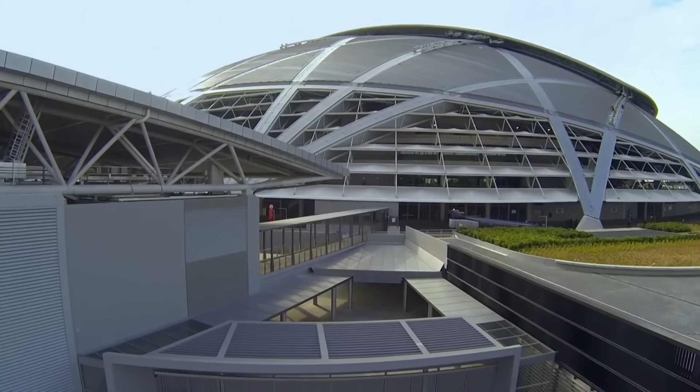The Singapore Sports Hub has arrived, the world's ultimate multifunction sports complex. Like a giant transformer, it adapts to host more than 30 different sports. The sports hub in general is amazing because it's state of the art. And its crowning glory is the new National Stadium. We needed to create a world-class venue, a landmark.

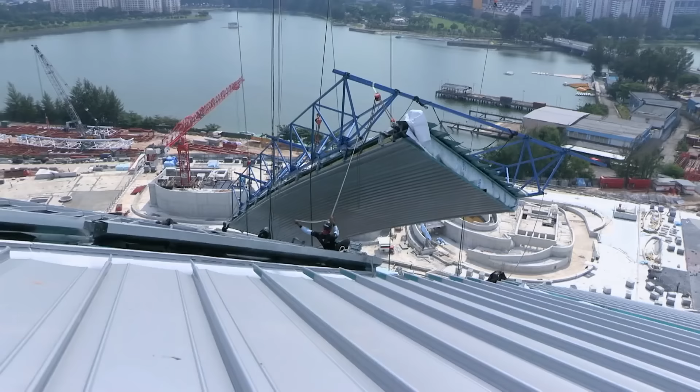Building the Sports Hub has been an epic 3-year journey. Welcome to my office. An army of workers risked life and limb to create the stadium, 9 other multi-purpose venues, and the world's largest free-spanning dome roof. A bold vision that is now Singapore's Field of Dreams.

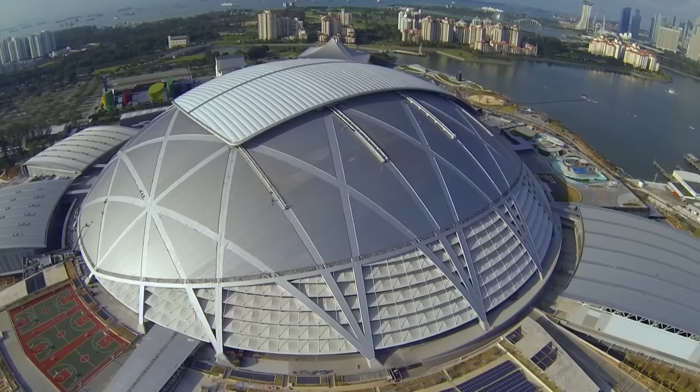June the 28th, 2014. It's open house day at Singapore's brand new National Sports Centre, a place where everyone can play.

The typical conception of a stadium is that it's a place where you hold big events. When you're not having a big event, it lies empty and quiet. So we wanted the Sports Hub to be alive all the time, somewhere Singaporeans will come on a regular basis, not just for big events, but to take part in events themselves.

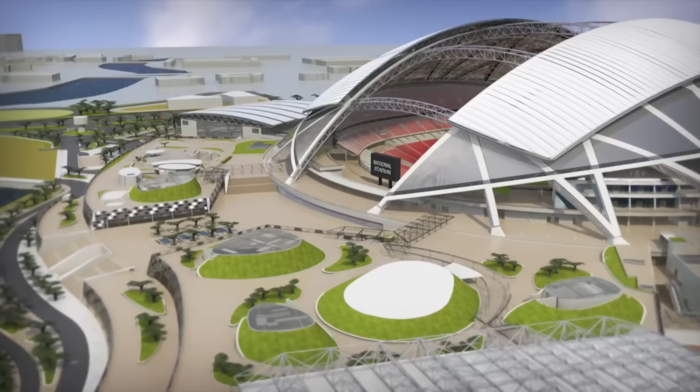The Sports Hub is jam-packed with features: a 55,000-seat stadium, sports halls, water sports centre, public water park, indoor aquatic centre, and a multitude of community facilities, including a museum, a library, and even a retail mall.

But this place is about much more than fitness and fun. It's a fantastic stadium, but it's got a big job to beat the old National Stadium.

The Sports Hub is also the proud new home of a great tradition, a tradition that began on another memorable opening day 40 years ago. I now declare the stadium open.

In 1973, Singapore's brand new National Stadium was a monument to a young nation's unity and pride, and a symbol of its determination to make its mark in the world of sport. That year, the National Stadium hosted the Southeast Asian Peninsula Games, an unforgettable moment for Singapore and for Singapore's greatest sprinter, C. Kunalan.

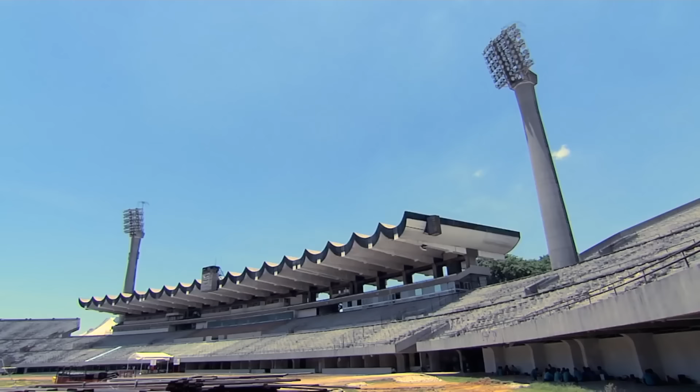But almost 4 decades since its opening, the National Stadium's race had run. Our national stadium was beginning to look quite old, and our aquatic stadium in Toa Payoh, both built in 1973 when we first hosted the SEA Games, and we all wanted to see modern facilities.

The problem was where to put them. Vacant land is almost impossible to find here. Singapore's new home of sport would have to be built where its old one already stood, the Kallang Basin. So the old stadium had to go. In September 2010, the bulldozers moved in.

When I found out that National Stadium would be demolished, not only me, all my friends, teammates, we were surprised and very sad.

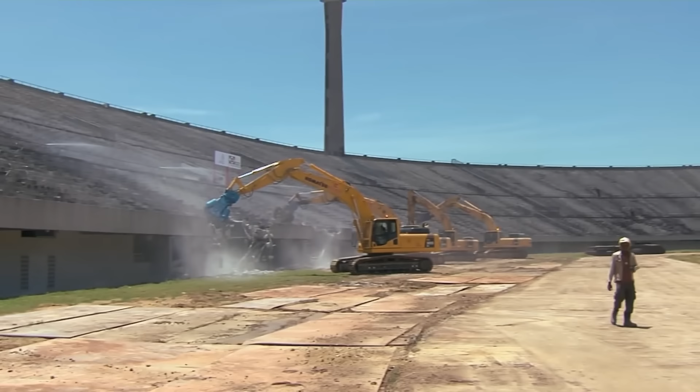Although I did feel it was a big part of me, a big part of Singapore, when it was finally decided that the only way was to demolish and rebuild, I was in support. The way I look at it is sacrificing for the greater good for the future. Our young people are not going to be thrilled by that old stadium, so when they see this new hub, they will be thrilled. I think it's for the better.

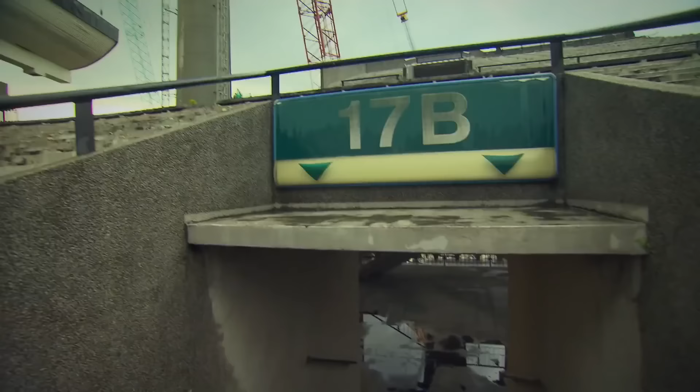The entire Sports Hub project has to be completed in under 4 years, so there's not a moment to lose. Even a national icon has to come down fast.

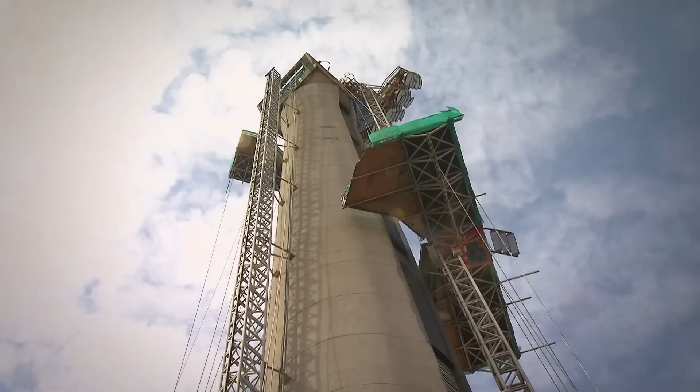It's now November 2010, 3 months after demolition began, and lead engineer Liu Yu Sin knows he needs to pick up the pace. It's a bit of pressure because time is short, we have to work very hard. But a giant obstacle is standing in his path.

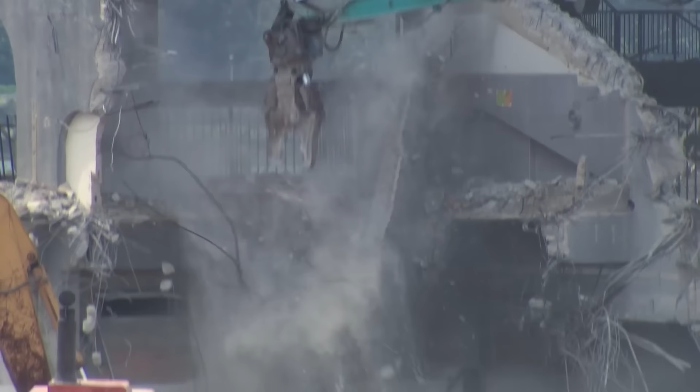The stadium's iconic 68-meter light towers were made to last several lifetimes, and they're far too tall to be safely demolished by heavy-duty crushers. Liu's team considered using explosives, but flying debris could damage neighboring buildings. So they decide to try a rarely used demolition technique: slicing the towers into 4 manageable pieces, so the crew can bring down one piece at a time and crush it at ground level.

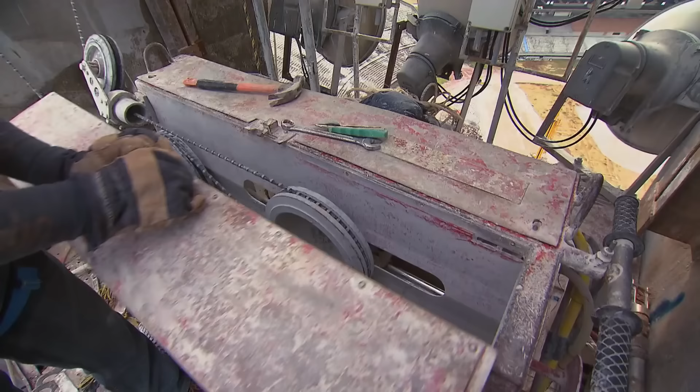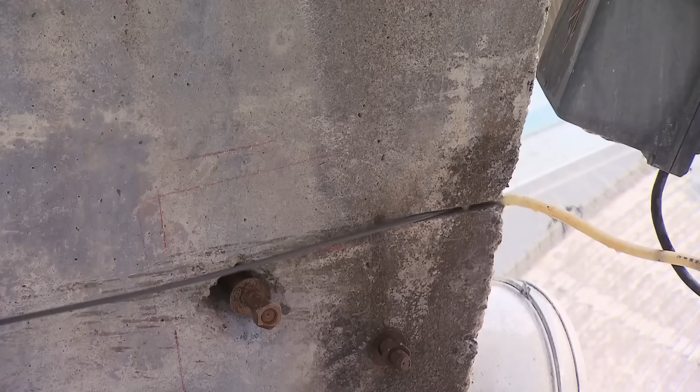But they can't slice the towers with an ordinary steel saw, so Liu turns to the ultimate weapon in his demolition arsenal: the diamond saw. The white part is the diamond. Inside it is steel wire with rubber. When the machine starts, the motor will pull the diamond wire, and the diamond wire will start cutting the tower. A stream of water keeps the cutting cable cool.

If it overheats, the wire will expand, jam, and then snap, with terrifying consequences. If it breaks and someone stands nearby, it will snap at somebody and injure them.

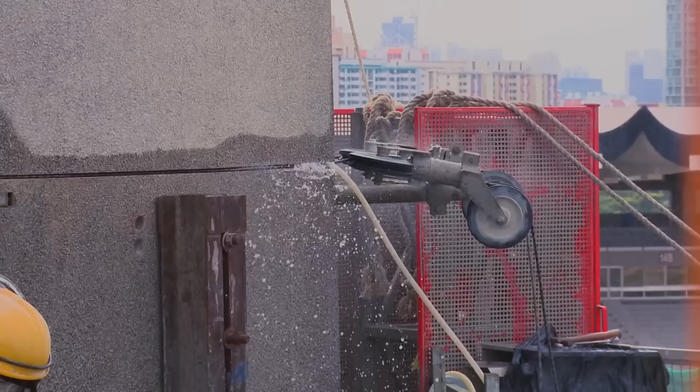As if deadly diamond-studded wires aren't enough to worry about, a thunderstorm suddenly appears on the horizon. If heavy rains come and there's lightning, we have to stop work because this will endanger our life.

With a ground team keeping an eye on the menacing clouds, Liu presses on. So the tension, okay ah?

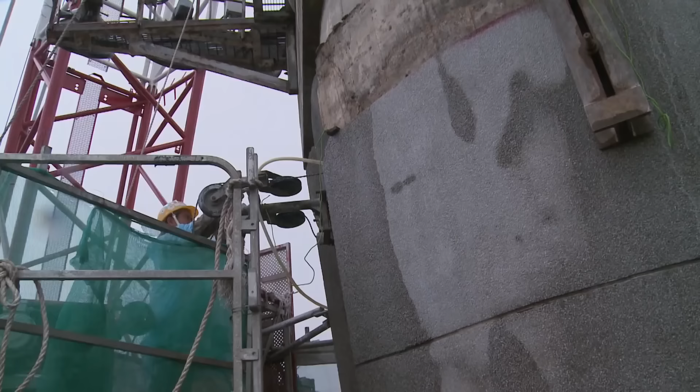Finally, after a full day's work, the diamond saw slices through. That's the first of 3 cuts on this tower, and there's still another 3 towers to go.

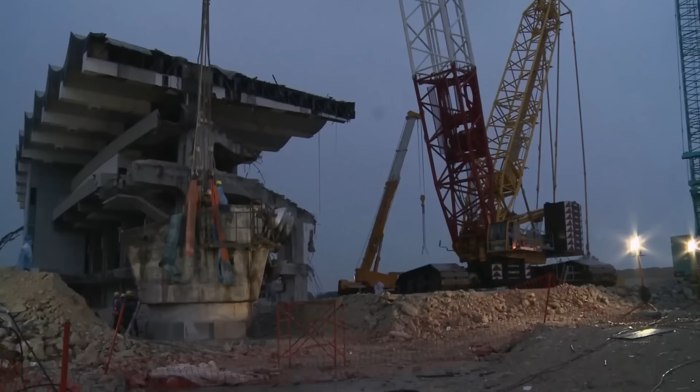While Liu's team reduces the old stadium to dust, that's a challenge in itself. A design team of local architects Teo Hai Pin, Sia Chi Huang, along with Clive Lewis, were working overtime on its replacement.

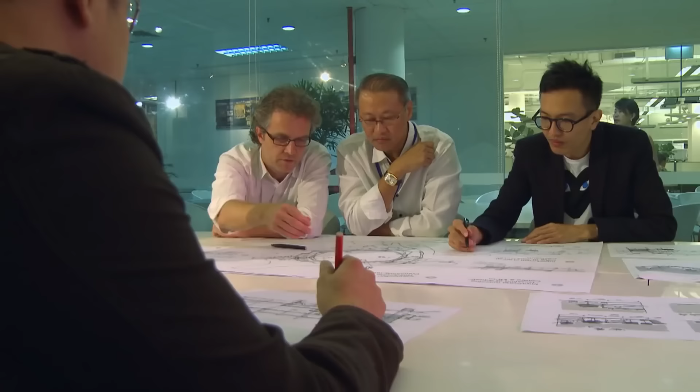It actually has mechanical exhaust, which means it starts to act like a ship. I think we were struggling with the identity, to arrive at the identity for the national stadium.

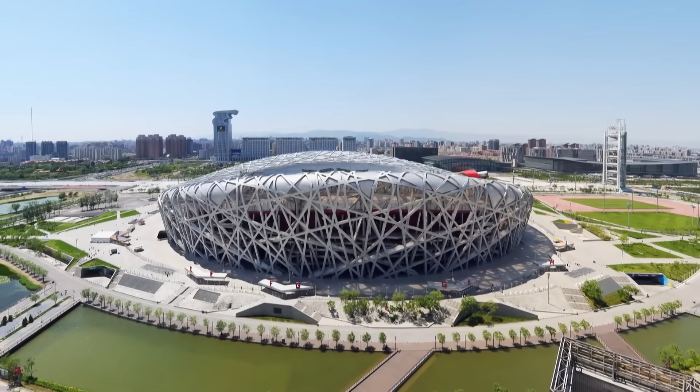They've had a hand in building some of the world's biggest stadiums, including London's Wembley and Beijing's Bird's Nest. Singapore's new stadium needs to be just as impressive. It is supposed to be a national stadium, so we needed to create a world-class venue. But how do we aspire to create a landmark?

The team turned to nature for inspiration. They drafted designs sparked by tropical plants and experimented with curves and spaces.

After going through many designs and many debates, we started to appreciate a very simple structure. So a simple dome eventually was adopted, and the trick then is how to make this simple structure look beautiful.

It's actually quite emotional to see how it has grown, and we have spent 8 years of our life on the project. But what we are really looking forward to is how we see our design translate from paper to the physical form.

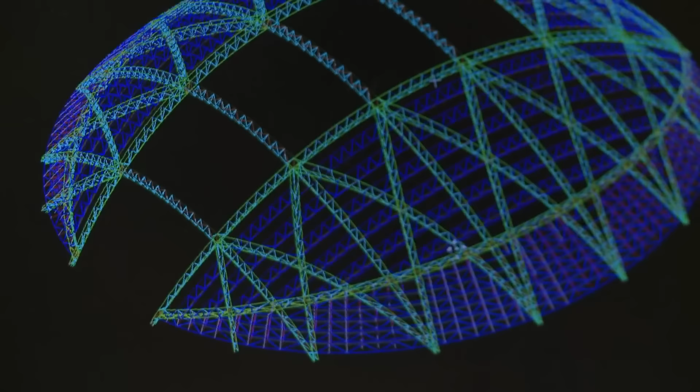The team designs a stadium that could comfortably hold the Sydney Opera House inside its shell. It will be the largest free-spanning dome in the world.

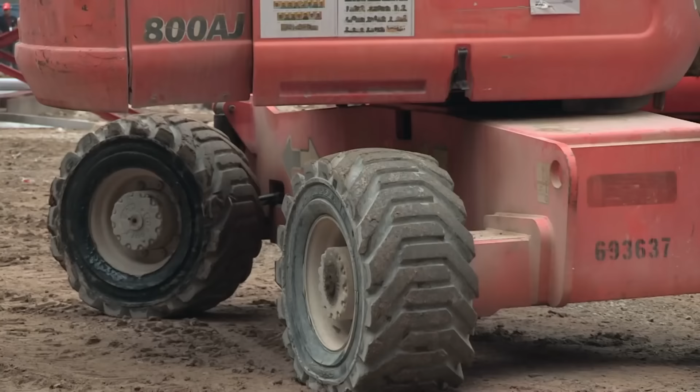By the end of the second year of construction, most of the roof is in place. So far, the massive web of steel has fitted together perfectly. But only now, when they raise the final roof truss into position, will the team find out if they've succeeded.

The worst case scenario is that during the lifting, the truss cannot go inside. If the truss cannot be fixed, we need to bring down the truss and do it all over again.

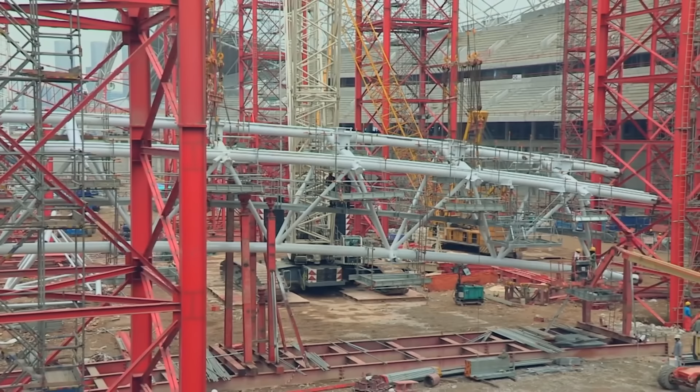This last truss spans 78 meters and weighs a colossal 140 tons. Two of the largest cranes in Singapore will be taking on this Herculean lift. If its operation isn't synchronized perfectly, the cranes and the truss could come tumbling down. And if the cranes aren't in exactly the right locations, they can't lift the truss to where it needs to go.

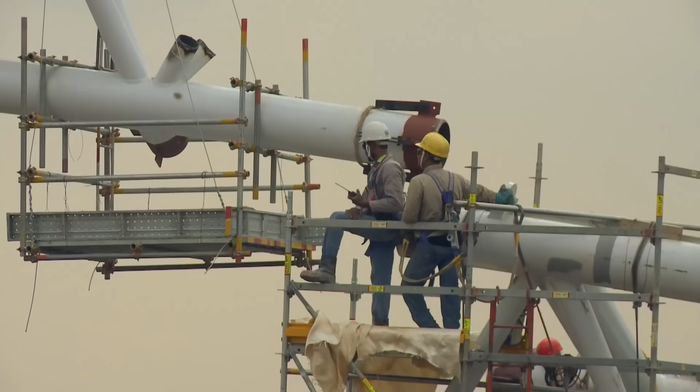But after 2 hours of delicate maneuvering, the truss locks perfectly into position. Everything went so smooth, it's perfect now. I'm very happy that the truss is finally in position. It's been a good day for the stadium builders.

One challenge met, but so many more to come.

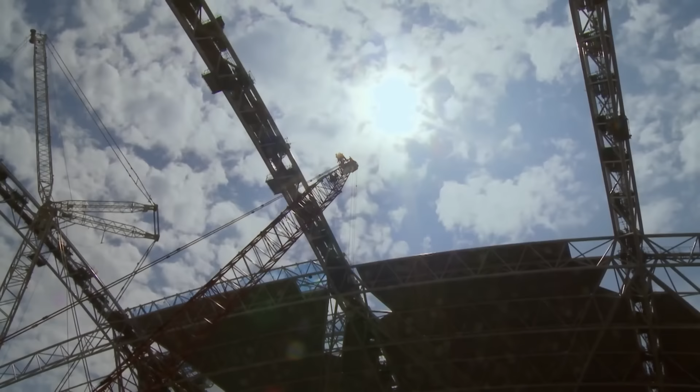Singapore's new stadium will be of epic proportions, and that's given its builders another big challenge. When you put a stadium that size just one degree north of the equator, how do you keep thousands of people inside cool and dry?

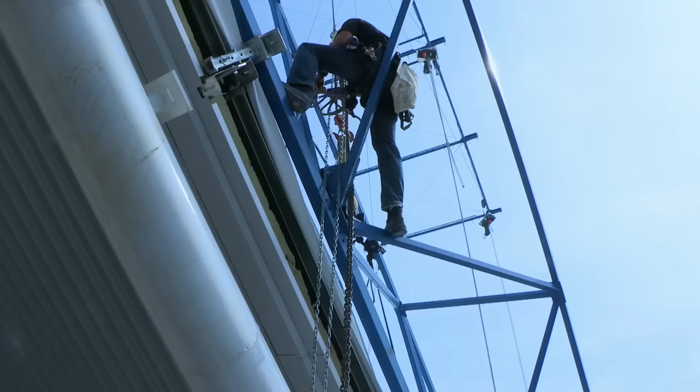You call in the Spider-Men, Singapore's only rope access experts, led by 8-year veteran Fauzi Razak. This job is actually very, very high risk, but in terms of being scared, I got used to it actually.

The Spider-Men start the day with a precarious 30-minute climb to the top. Welcome to my office, the view, it's beautiful. They're risking their lives to make the lives of sports fans easier.

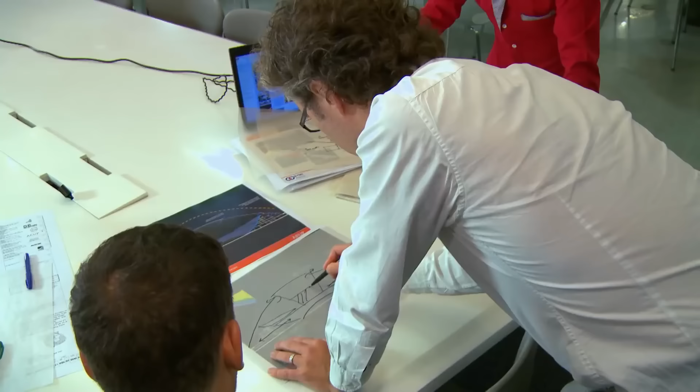To shield fans from extreme weather, the team has created a very special material to cover the roof: a combination of insulating foam sandwiched between two sheets of highly reflective, lightweight steel. By reflecting and absorbing solar energy, it should block out most of the sun's heat.

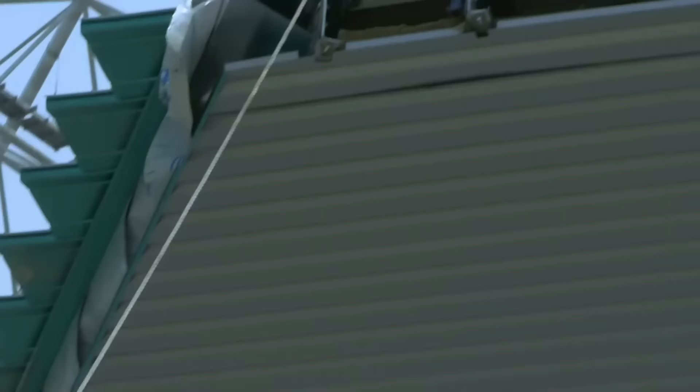But first, the Spider-Men have to install nearly 500 panels of it, 80 meters up. The Spider-Men can't afford to make a single slip, and they don't intend to.

Even though I'm at 80 meters above the ground, I know I'm very, very safe. There will always be two ropes attached to me. If anything happened to one, I still have the other. So it's very, very safe.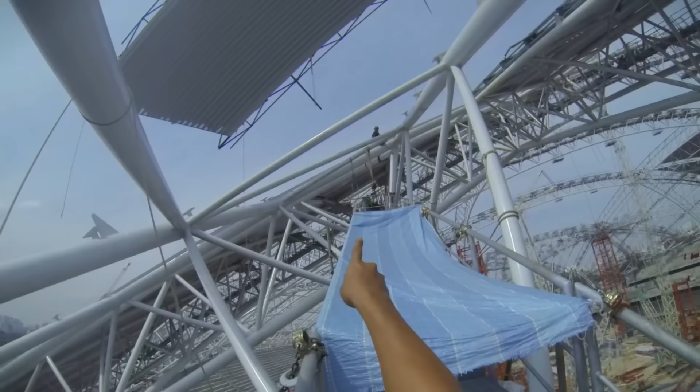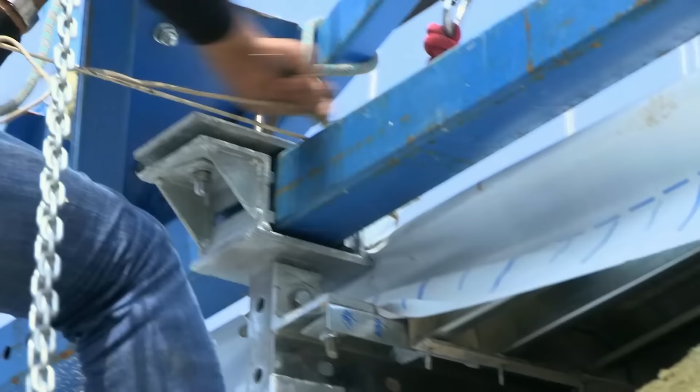It takes a little bit of time because of the alignment and everything. So yeah, we're doing good here, just a few more minutes and we're done.

Every day, the team bolts on at least two of these roof panels, weighing between 2 and 22 tons. Now it's 107 installed. I got one down here, and we've got 337 to go.

Far below the Spider-Men, another state-of-the-art sports venue is taking shape. The Sports Hub's Aquatic Centre will host not just swimming, but also water polo, synchronized swimming, and diving competitions.

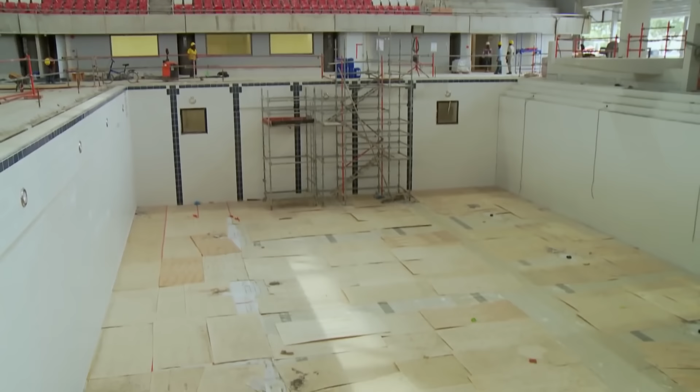It will be equipped with the latest competitive swimming technology, including electronic timer touchpads and underwater cameras that sports scientists will use to train a new generation of elite Singaporean swimmers. A super pool for future champions, and a dream come true for a living legend.

Ang Peng Siong was the winner of 1982's World's Fastest Swimmer Award. A year later, as Singapore hosted the SEA Games, he won gold in his pet event, the 50-meter freestyle. But at the time, Singapore lacked a world-class competition pool.

With the Olympic Games, you see stadiums that are really magnificent, and I thought it was quite appropriate to rebuild a new facility. I'm very happy that they decided to build it. It looks really grand.

To fulfill its destiny as the center of Singapore's sport, the National Stadium will have to offer not just one, but three different playing fields: one for cricket, one for track and field events, and one for football and rugby.

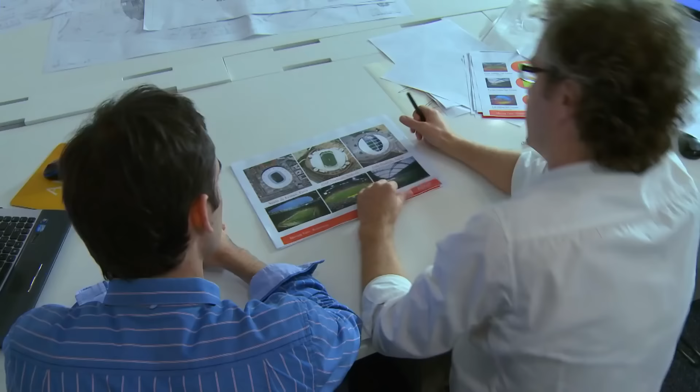Introducing moving seating was the obvious solution. It's a fantastic opportunity to do everything in one space, so we get 3 sports configurations in one stadium.

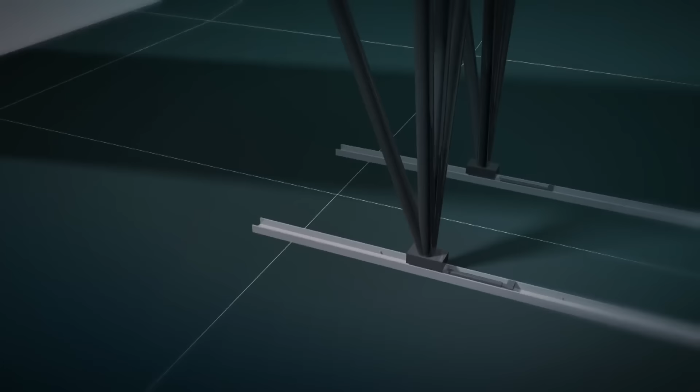The design team came up with a simple but effective solution. They placed more than half of the seating into movable lower tiers. But how would those tiers change from one seating configuration to another? The team decided to lift them with nothing but air, raising them with high-pressure air-filled skates made of tough, low-friction Teflon, then dragging them into position with powerful hydraulic claws.

But the system is untried, and everything is riding on its first test: moving one fifth of a full tier section that weighs nearly 300 tons, in line with the final position. So installation is good for you?

Failure would mean redesigning and rebuilding the entire system, and would set the construction schedule back by months. A lot of things could go wrong, in fact.

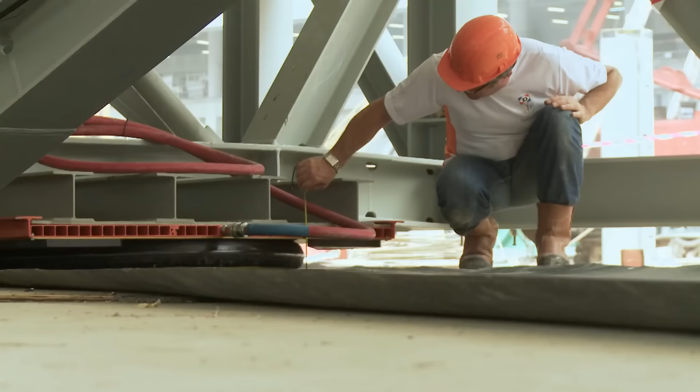The first one is we cannot lift anymore at all because everything is too heavy. We could lose too much pressure and land too soon, or the jack might not be strong enough. Here we have 2 jacks only, but after we will have 7 of them, and they have to work all together in order to keep the lower tier sliding in a straight line and not to turn.

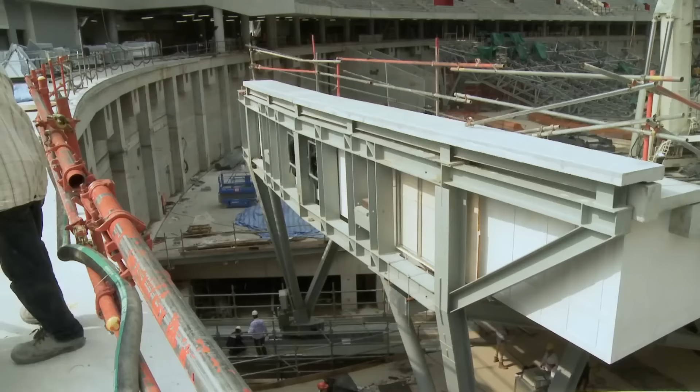The 300-ton tier moves without a hitch. The construction of the 8 moving tiers can now proceed as planned.

Everything goes really pretty well. Some small improvement to do, but it's very good. It's a moment to savor. But as night falls, another challenge looms.

Engineers get ready to build one of the largest moving roofs in the world.

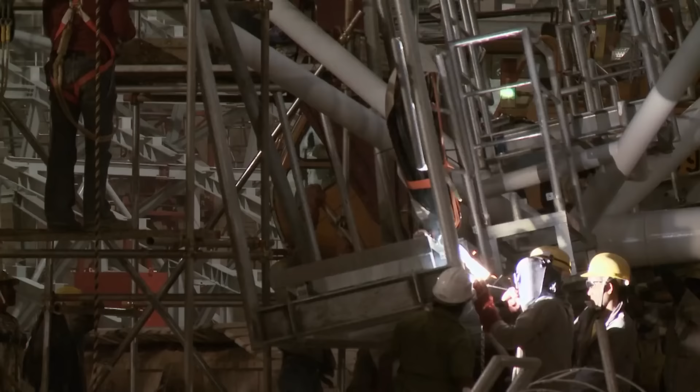January 2014. The epic task of building Singapore's new sports hub enters its final year. The construction team is about to pull an all-nighter, installing one of the National Stadium's most impressive features: its movable roof.

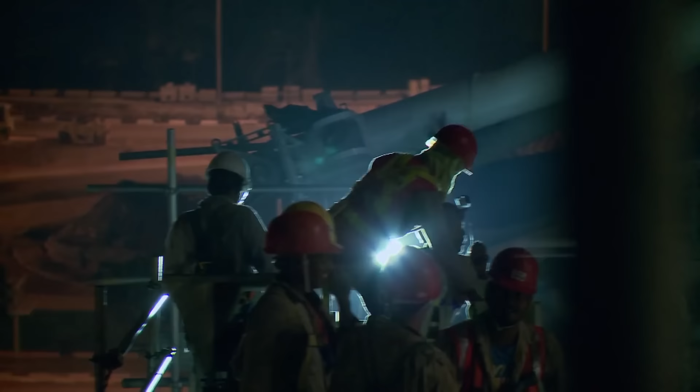The wind is very strong up there, so we need to be more careful. Careful indeed, when the roof truss you're moving weighs 90 tons. This is quite heavy, it doesn't swing that much. We just have to be patient. When the wind is blowing, we just hold it there. Once the wind is calmer, then we start to lower it slowly.

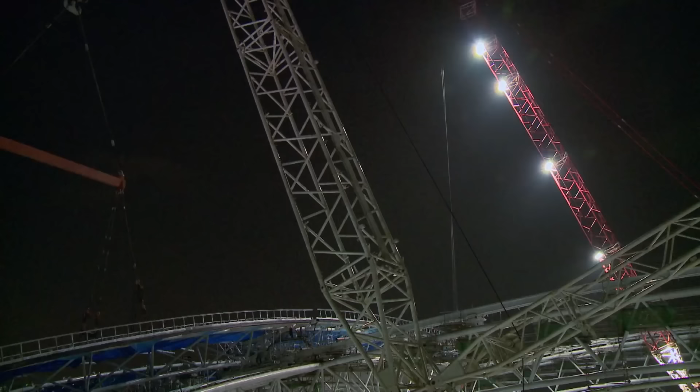This will take another 3 to 4 hours. Once that's done, we will release the hook, and that completes the whole operation. It takes 4 months to build the stadium roof.

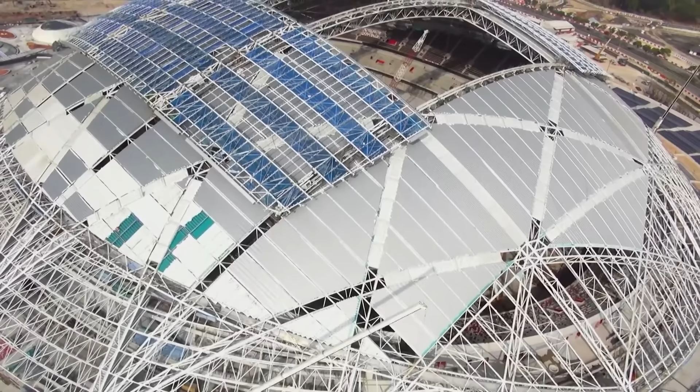When it's finished, its builders must make sure its 2 colossal halves actually do close. Lead engineer Arnaud Georgentham's team of software engineers mans the command center. We have 3 kilometers of tracks, and the roof is 200 meters, so this is a large space to cover.

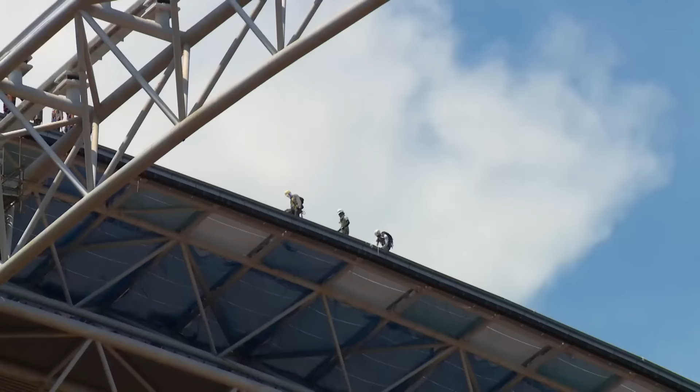We are checking during the first movements that there is no clash between the bogies and the track beams. At the same time, we also have sensors which have to be adjusted to check the position of the roof. This is a lot of things to control at the same time.

V-run, can we move now? It's clear now, okay Chi, we proceed. The sliding roof's individual motors have to be precisely speed controlled so that the entire roof travels evenly.

For this first closing, their speed is cautiously slow. So far it's going well. The tensions are okay, mechanically everything is okay.

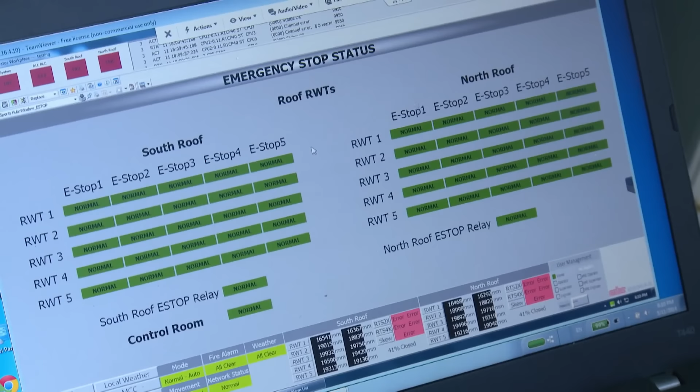But the roof suddenly stops. Arnaud and his team check all software systems and inspect all motors and tracks. But everything appears to be as it should. Until the team finally identifies the culprit: one of the system's many sensors.

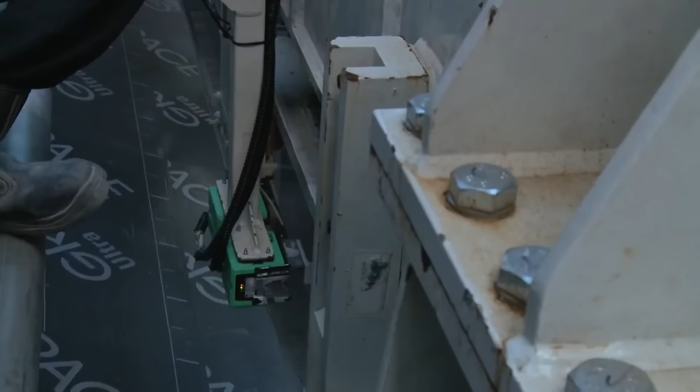We have a lot of sensors in this roof to check the positions of all the runway truss, and this one has given the wrong information, so now it has triggered the emergency stop. Can you check that it's not clashing with the reader, that we have enough space? This is more a matter of adjustments. This is the purpose of the test, to adjust all these sensors. Now doing quick tensioning, right?

Okay, north roof moving now. Yeah, you see the tensions between the north and the south look almost the same. Looks good. We still have another 60% to do before we manage to close the roof.

It's not fully closed because we are still doing the final works on the joint itself, but the alignment is there already. The alignment is correct. The stadium's retractable roof will be one of the largest in the world.

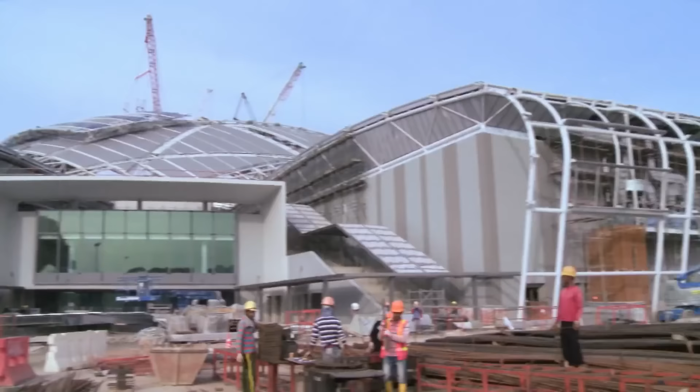And it won't be the only place in the sports hub that can transform itself. The Aquatic Centre can convert its 50-metre Olympic pool into two 25-metre pools, so athletes can train on one side while the public enjoy the other.

And staff at the two multi-purpose arenas can reconfigure collapsible seating to suit a variety of sports, like badminton, table tennis, basketball and gymnastics.

Back in the stadium, a father and son team are stepping up to a daunting task, turning the world's biggest free-spanning dome into a world-class sound and visual stage.

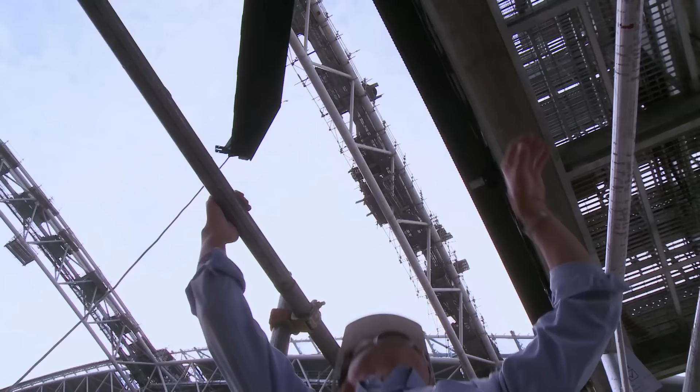For Dad Ronald, it's a case of déjà vu. 40 years ago, he was at exactly the same spot, facing just as big a mission. At the old stadium, we installed the main sound system for the outdoor as well as for the indoor. Winning a contract for the old National Stadium was a turning point for the family business. It was the biggest project that I've ever done, when I was 28 years old. So, we were still actually green behind the ears, but then we had the opportunity to work with good people.

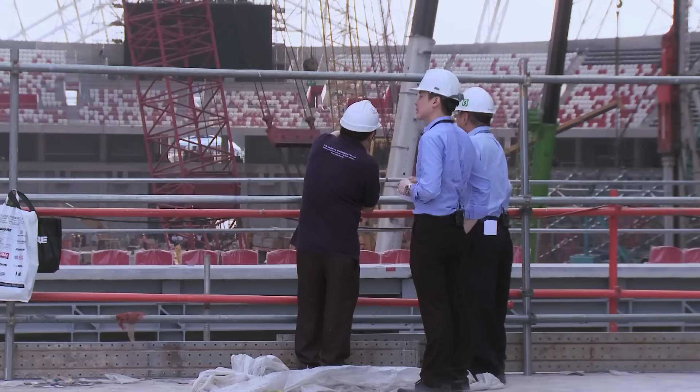In those days, it was a very simple, analog system. The system here is so much more complex. So it is entirely a new ball game as compared to what we did 40 years ago.

Today, the baton has passed to son Gary. I feel really fortunate to have the opportunity to work on the new National Stadium on the same exact site, 40-something years later. But filling this enormous space with concert-quality sound will be the greatest test the family firm has ever faced.

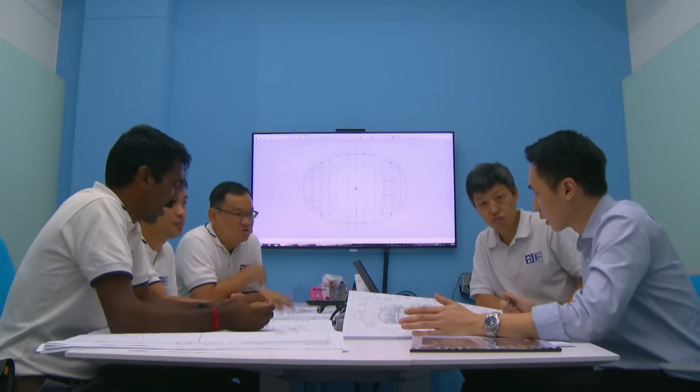The stadium is a big acoustical environment, so the challenge is to have as directional a speaker as possible to ensure that all the sound is directed towards the audience and not to the areas where you don't want sound.

If Gary doesn't get the direction, position and power of all the speakers right, spectators will hear a muddied, incoherent mix of sounds. The use of simulation software allows us to make very fine adjustments with the speaker positions to ensure that we are achieving optimum coverage with minimum interference.

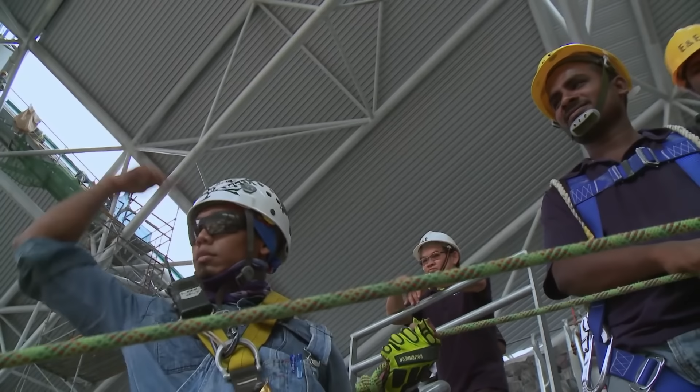Today, workers are installing the first of 90 speakers. Gary won't know if he's got it right until they're all in position and he's pumped up the volume. My dad has left pretty big shoes to fill, and I definitely feel pressure with my dad watching over me, but that's what sort of drives me to do even better.

Atop the stadium dome, another team takes on a very different mission: covering the movable roof with translucent and heat-resistant plastic pillows made of ETFE plastic, the same material used on the Beijing Olympics Water Cube.

The Sports Hub's ETFE pillows will let full daylight in, but block out most of the sun's heat. So we only get 8% solar radiation through that material, but we're able to get the effect of natural daylight within the space. So that's quite an amazing material to be able to use. It's also very, very lightweight.

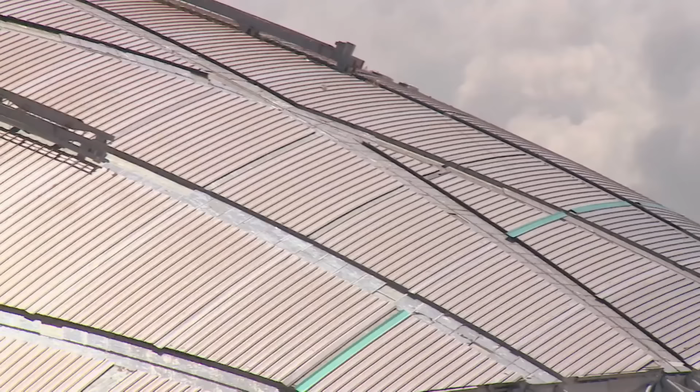But in Singapore's year-round 30-degree climate, even the miracle of ETFE won't be enough to keep the stadium cool. If we can just drop the temperature very slightly, 4 or 5 degrees, that little bit of cooling and air movement can make for a much more pleasant environment.

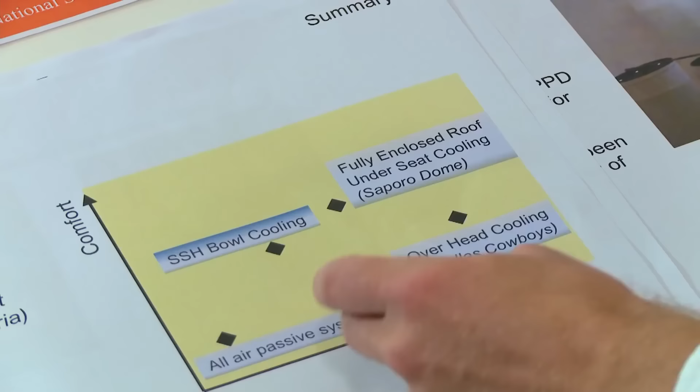Air conditioning the entire dome would be far too energy intensive and expensive. In terms of the temperature range and comfort criteria for the middle of the day, the team came up with a brilliantly simple alternative.

Energy from an array of on-site solar cells powers air conditioning. The chilled air blows out from under every seat and uses less energy because it only cools the areas around the spectators. So we ended up with a bowl cooling system that used about one-fifth of the energy required compared to a conventional air-conditioned stadium.

Day after day, year after year, the Sports Hub's builders have faced and met the challenges of turning a daring design into reality. But now, time's nearly up. Everything must be ready and work perfectly. The ultimate test is only weeks away.

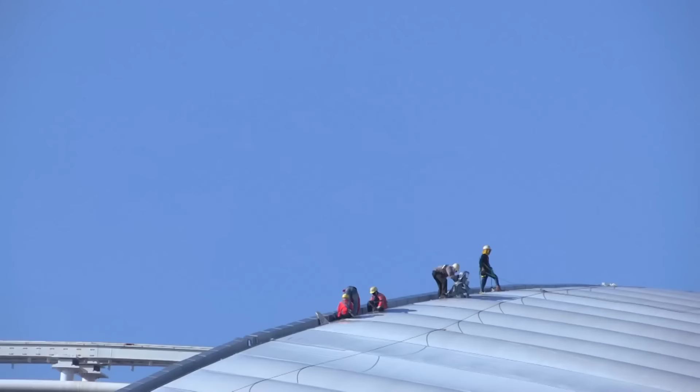April 2014. The Sports Hub's scheduled completion is only weeks away. More than 1,000 workers are laboring around the clock to meet that deadline.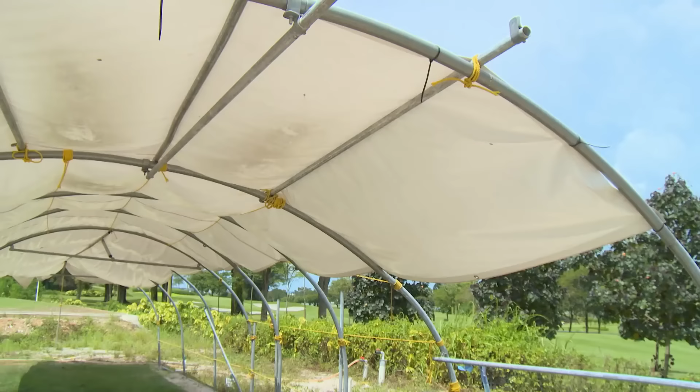Across town, Greg Gillen has been confronting a very different challenge: growing the stadium's grass. We're currently out at the Orchid Country Club. For the last 18 months, this is where we've been destruction testing our sports grass to try and find the toughest breed of turf for our Singapore Sports Hub National Stadium.

Grass usually grows like crazy in Singapore's tropical climate. But it's a much tougher life at the National Stadium. Because of the 83-metre dome, we have very little exposure to sunlight, so we have to come up with a different solution of turf grass.

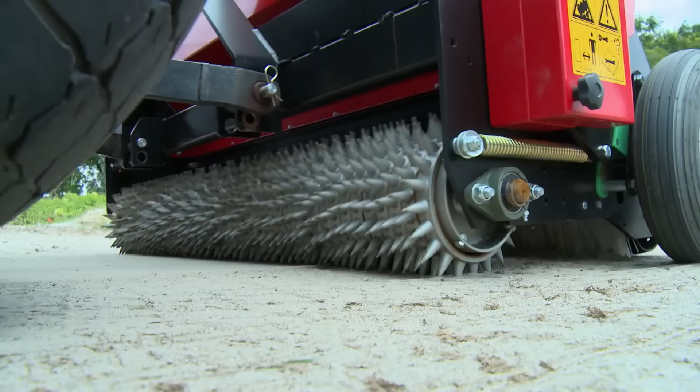To find a grass that could cope with the unusual conditions, Greg and his team test planted more than 15 varieties. We had to try and recreate our light and ventilation conditions, so what we did is we built a shade structure to try and replicate the conditions inside the stadium.

At the end of the trial, Greg came to a surprising conclusion. We found that the Northern Hemisphere grasses adapted much, much better to the stadium microclimate that we were trying to recreate out here. The winner of the turf trials was a combination of Kentucky bluegrass, which gives toughness, mixed with a faster germinating ryegrass that recovers quickly after events.

Both were stitched into the surface last weekend, and we've now started to see, after 4 days, the ryegrass starting to come through, and we expect to see this come through in about another week.

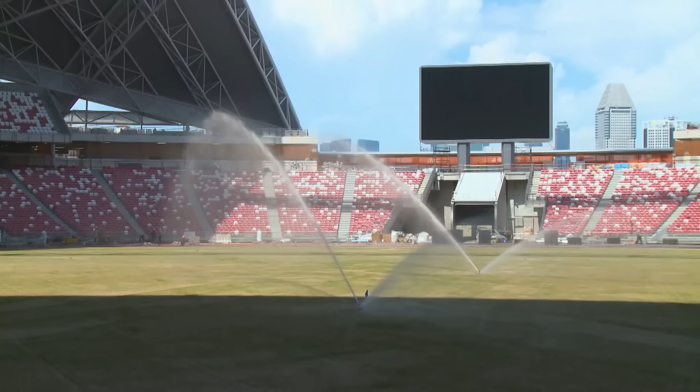The stadium's new turf had better grow up to be as tough as it's supposed to be. Life's not going to be easy. The grass on this field will have to withstand some of the most punishing treatment in the world.

We could have up to 100 events a year, so that means we have to have a very robust sports turf so the players can run at the ball with confidence and not feel like they're going to slip or slide or injure themselves.

Greg decided to reinforce the stadium's pitch with a high-tech artificial turf. Mixed with natural grass, the Desso GrassMaster system uses strands of tough artificial fibers stitched 140 millimeters into the soil.

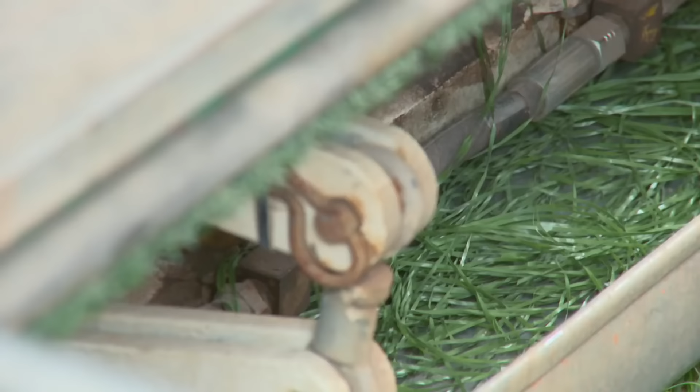So what we've got here is the Desso machine, which acts like a giant sewing machine. These are the needles that stitch, or are pushed straight down into the playing surface, and every 20 millimeters, they will stitch fibre into the surface.

By the time we're finished, there's going to be about 114 million fibres in this surface, which makes up about 3% of the playing surface.

The interwoven mesh of Desso grass locks the surface together. Those fibres are punched down, so that gives them that anchoring ability, so when the player's stud interfaces with the top of the fibre, it doesn't pull out. The combination of the two makes it a very strong playing surface, and as such, FIFA have qualified this as 100% natural playing surface.

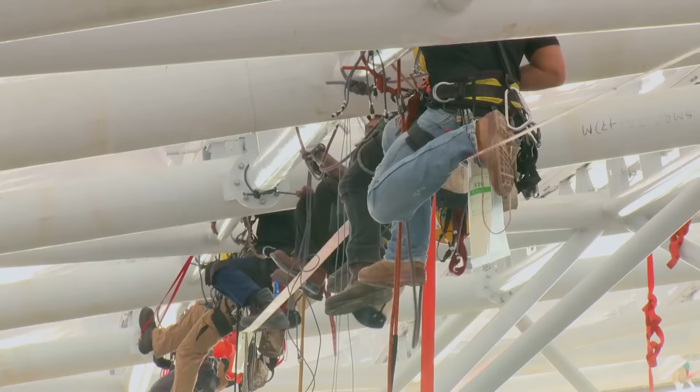80 meters above the turf, a team is hanging precariously between the dome and the movable roof, creating one of the world's largest LED projection screens. The ETFE roof pillows will be illuminated by programmable LEDs, so almost anything can be projected.

This is one example of what we've installed on the roof. There are 6,000 of these T-bars across the roof, and each T-bar consists of 3 pixels, so we have something like 20,000 pixels on the entire roof.

The whole lighting sequence is synchronized from one single computer. It's a fancy concert lighting type system.

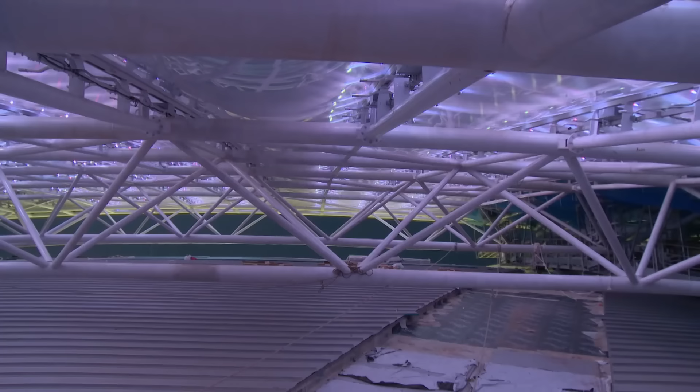Let's see if the lights work. Lights on. Looks like we've got a couple of lights that are not switched on over here. Looks like we have a connection problem over here. It's fairly common for installation as large as this.

So we're looking forward to having our Singapore flag proudly displayed on the roof.

As construction finishes, another team's about to learn if they've succeeded or failed. After working through the night, audio engineer Gary Go is about to have his 18 months of work judged a success or failure. Marking Gary's scorecard is the toughest of all critics, his father Ronald.

Today will be the first time that we are turning on all the speakers at one time. I think we've been waiting for this day for a while. We run simulations and all that, but it's another thing to actually hear it for the first time.

The goal was to deliver the clarity of a concert hall with the punch of a rock concert. To test the acoustics, Ronald will play an old favorite.

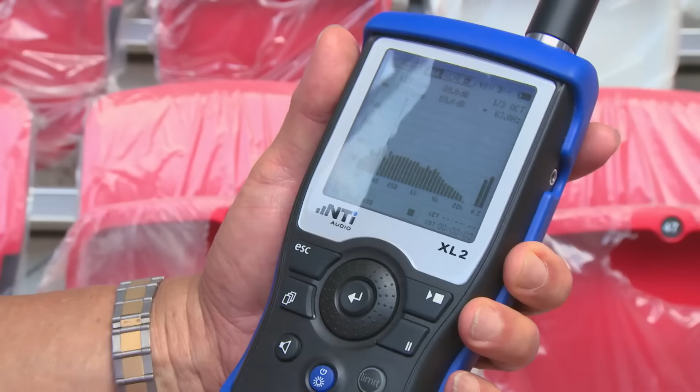That track has a lot of good memories for me. In fact, when we did the first stadium, I tested Bolero too. So this is what 300,000 watts of sound power sounds like. You can feel it in your chest.

I feel like I'm in a concert hall and not in a stadium. I'm proud of Gary and his team, who can make the sound system sound like this. It's awesome. Thank you.

Opening day is fast approaching as the Sports Hub gets its finishing touches, including a remnant from the past. There's a lot of sentimentality about the old Kallang Stadium because of the events that a lot of Singaporeans shared there. So there was obviously no way to keep the entire stadium, but one part was very cleverly recycled.

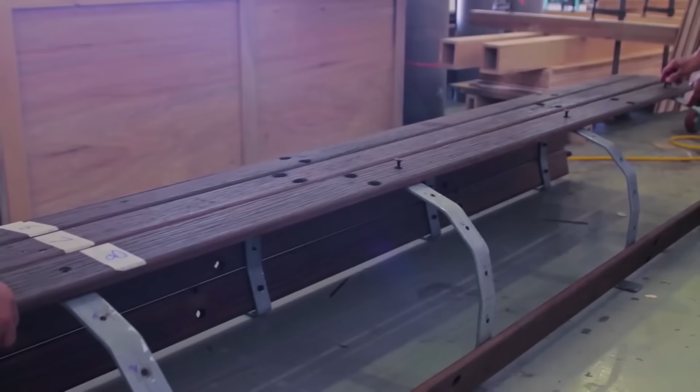In 2012, Singapore's Urban Redevelopment Authority commissioned designers to turn some of the old National Stadium's wooden benches into 26 new benches placed around the city.

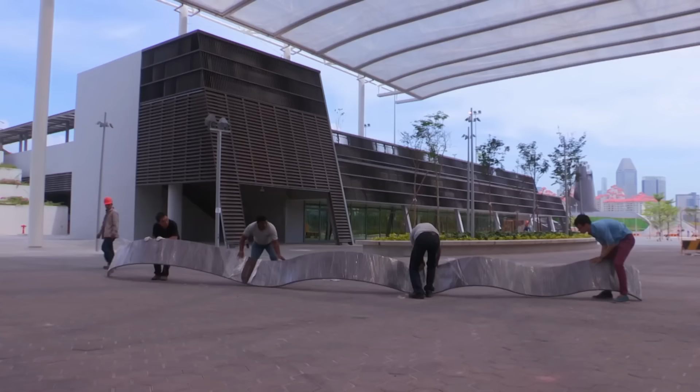There are so many ways we could make it go up and down. It could go up and up and up. Colin Seah and Angie Ng's bench design was inspired by the old stadium's beloved Kallang wave. The wave would happen spontaneously during soccer matches, and it became such a phenomenon - it's contagious, something that spreads throughout the entire round of the stadium once it gets started. That's why the bench itself is an extremely long length, 9 meters in total. It starts off with a smaller wave and grows until the largest. It embodies so much of this emotion and joy that you get.

In April 2014, the Kallang wave went to its permanent home at the Sports Hub's new Singapore Sports Museum. I just wish that they would extend it and make the wave 200 meters long, all around the stadium. That would be fantastic.

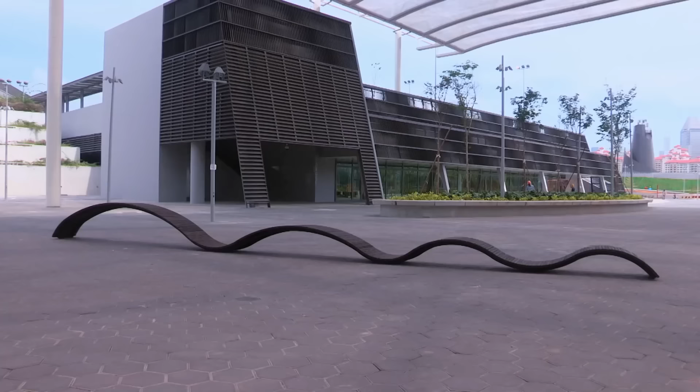June the 28th, 2014. After 3 years, the Sports Hub is complete. Now it's time for the ultimate test of Singapore's new National Sports Complex: opening its doors for the first time to the people it's been built to serve.

We want to make the Sports Hub accessible to all Singaporeans. It's a program for everyone. We have community basketball courts, community skate parks, lawn bowls, beach volleyball courts, and these are just for the community to have fun, just play.

I think it's really cool that the shopping mall has a rock climbing wall. It becomes more convenient at the same time, and I can go climbing all the time. It's very well finished, all the facilities are quite world class, and we are enjoying our time here so far.

And the Sports Hub isn't just a hit with amateur athletes - pros like it too. I've never seen a stadium like this in my life, and if 55,000 fans can come down and support, it will be amazing.

It isn't long before amazing happens. In August 2014, Singaporeans flock by the thousands to the first football match in the National Stadium, to see a Singaporean team take on Juventus, Italian football's most successful club.